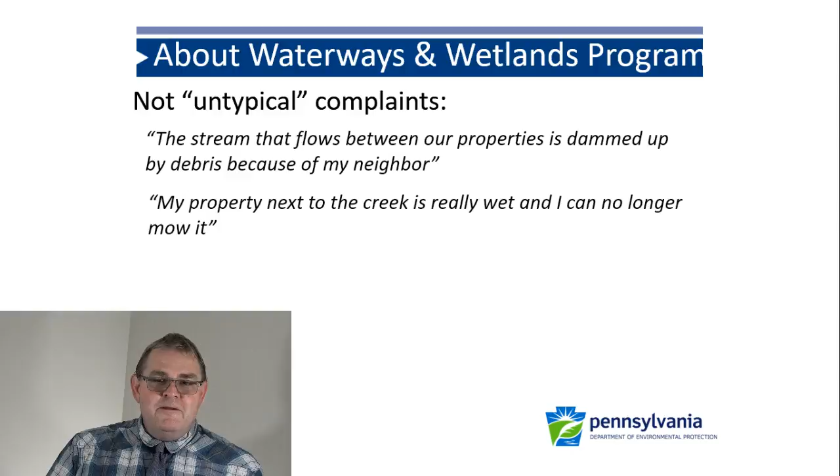My property's really wet, I can't mow it any longer. I lived there for 12 years and never had flooding before. The creek next to my property is flooding my yard. My neighbor is directing stormwater onto my property. My municipality will not maintain the stream located behind my house. And my neighbor built a dam.

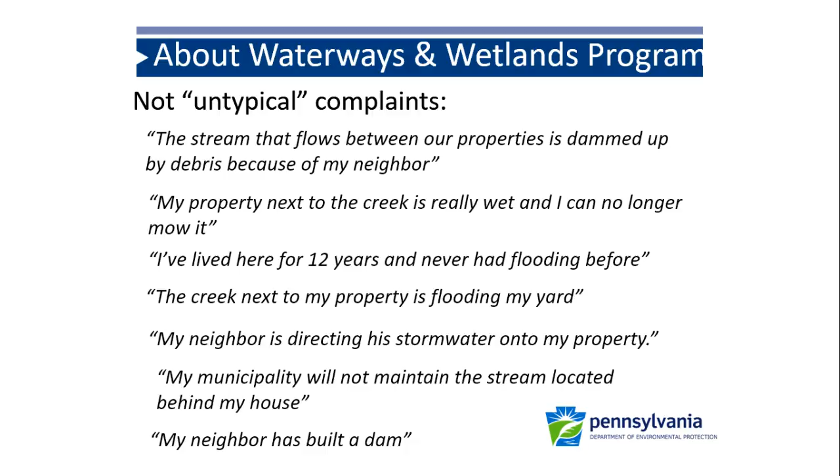These are a lot of comments we commonly see from citizens, and this is usually followed by the phrase, I was told by, you fill in the blank, that you could help. So they call DEP and say, there's a tree in the stream behind my house, I need you to get it out.

We're a regulatory agency. We're not a resource agency, we're not a conservation agency, we're a regulatory agency. So we review and act on permit applications, we conduct inspections and investigations, we take enforcement actions as necessary, and we develop regulations, policies, and procedures as required by legislation. Sounds very dry, but that's kind of what we're about often.

I'm with the Waterways and Wetlands Program, so we're going to talk a little bit about the Waterways and Wetlands Program and our impact. For our program in the Southwest region, I'm located in Pittsburgh. We have the 10 counties surrounding Pittsburgh as far as our jurisdiction goes.

Under Chapter 105, we regulate activities in streams, wetlands, and floodways. This includes wetlands, which are considered part of watercourses. Under Chapter 106, we regulate floodplain activities for municipalities and utilities only. We regulate construction stormwater and post-construction stormwater activities, that's in Chapter 102. We inspect dams.

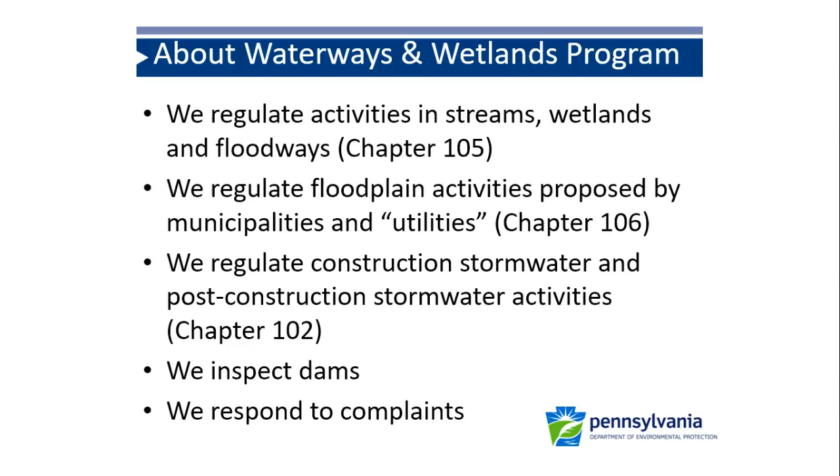My talk is primarily going to be on Chapter 105, because that's what most people seem to be interested in this time of year and the activities we're having. In Chapter 105, we have encroachment, which is basically an activity that changes the course or current of a stream or watercourse. This includes structures below the ground, even though they may not be seen. An example would be a utility line, so that's an encroachment.

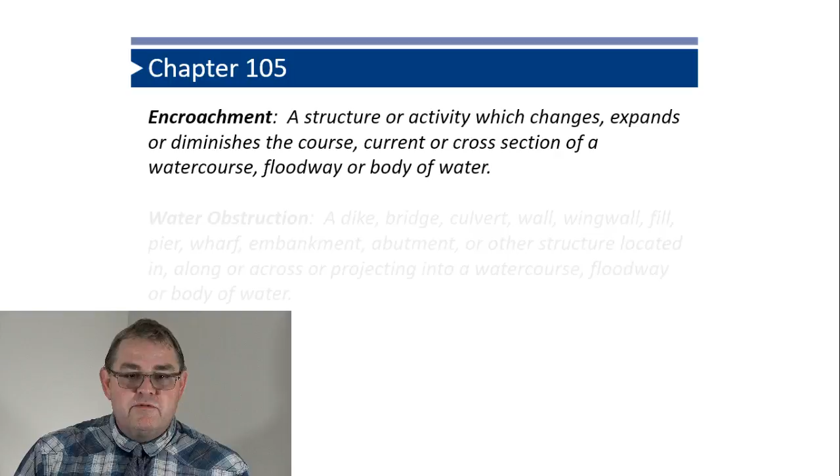A water obstruction is something that would obstruct the flow. So basically all obstructions are encroachments, but all encroachments are not obstructions. And I have a little illustration to show this.

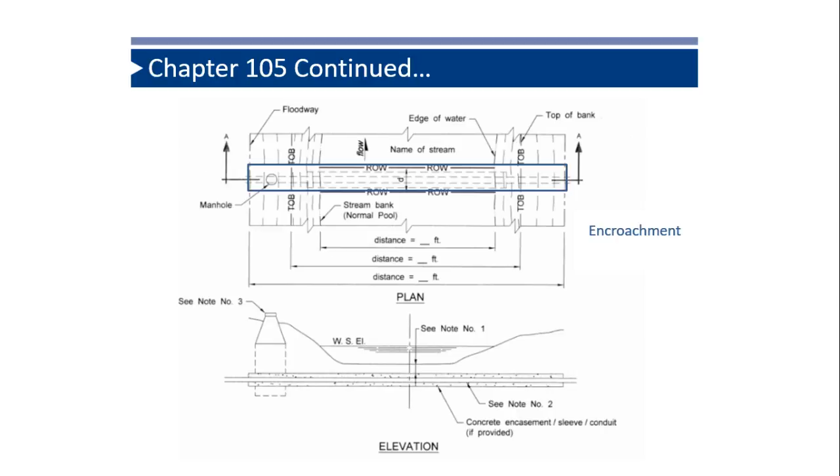This is from one of our permitting programs, a typical plan and cross-sectional view of a utility line going under a stream. That blue rectangle there is showing the encroachment area, the area that's going under the resource. You might ask why it's wider than the pipeline - well, the right-of-way is part of the encroachment because the right-of-way will have to be maintained. So there's your encroachment again on the cross section.

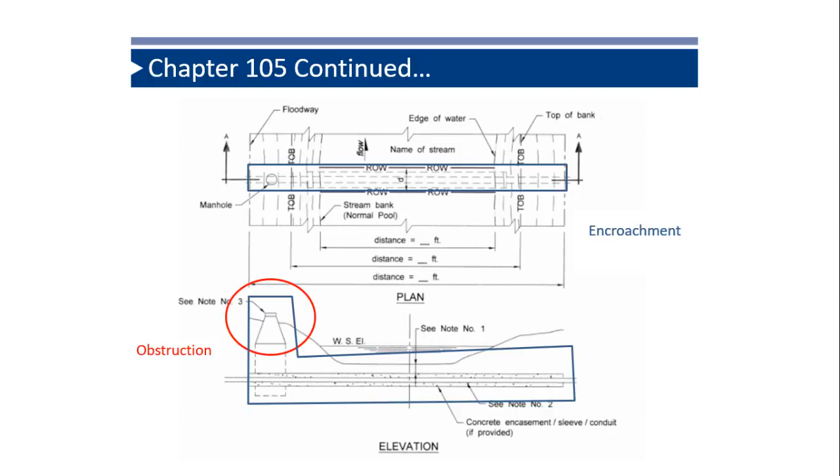The area right there is actually the manhole, part of the manhole sticking up. That can obstruct the flow, and it's in our jurisdictional area, which I'll talk about later. So that's an obstruction, and that obstruction is an encroachment. The other encroachment is not an obstruction because it's not obstructing the flow - a simple way of thinking about it.

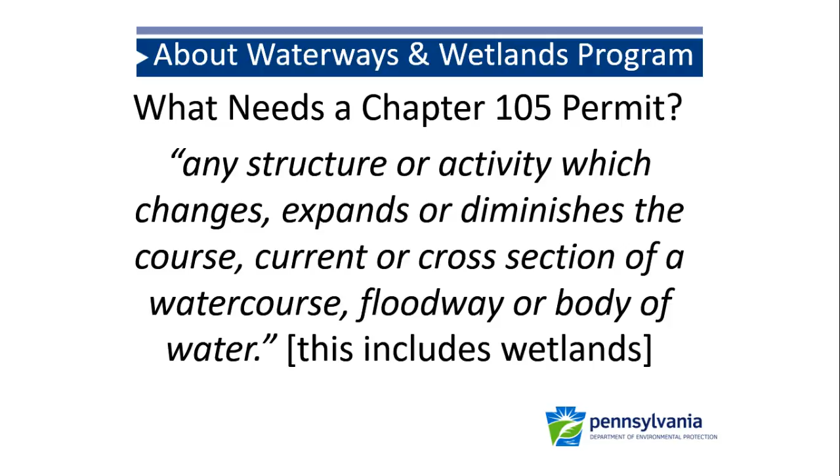So again, just to reiterate, what needs a permit? If you're going to do something that changes, expands, or diminishes, including wetlands, it's going to need some kind of authorization from the department.

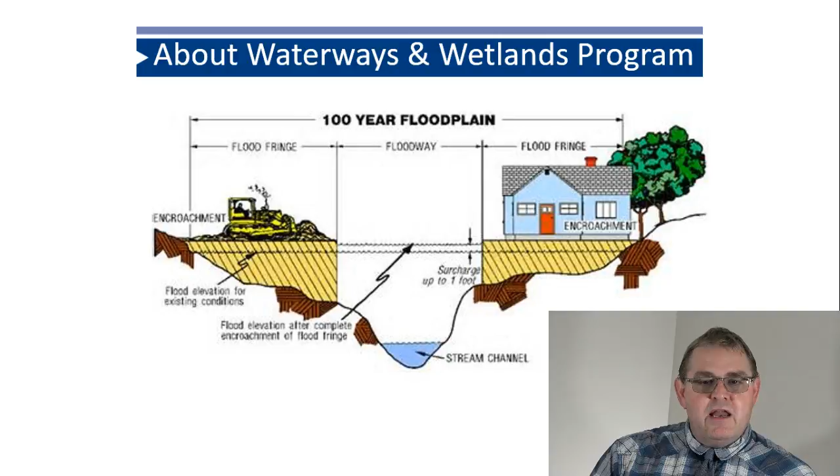This is a typical cross-section of a stream. You can see the middle part is called the floodway - that's our jurisdictional area, so we regulate activities in the floodway, which includes the stream and the floodway itself. The floodway is either determined by a FEMA study, or we assume it's 50 feet from the top of bank on either side. Folks can have the opportunity to try to prove that it's less. The area outside the floodway, shown in this sketch as the flood fringe - there's the DEP part.

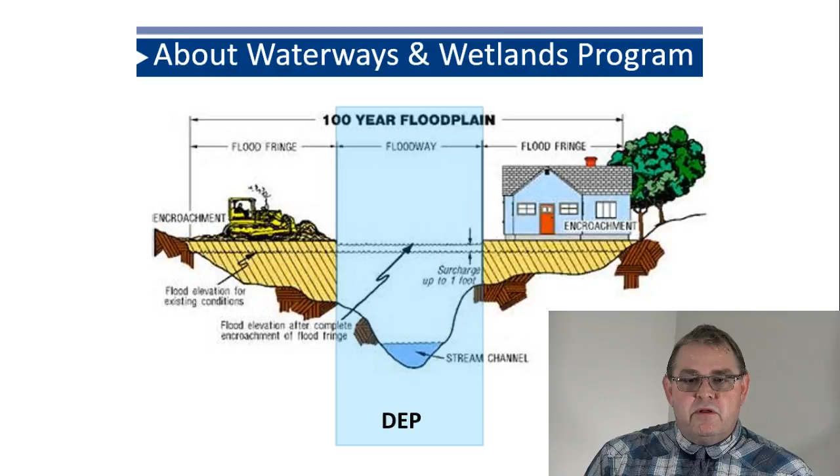That's the municipality's responsibility for management. The only time DEP gets involved with those areas is if the municipality itself or a utility wants to place fill in those areas. Since the municipalities are charged with it, they can't regulate themselves, so that's when DEP steps in. I mentioned Chapter 106 before — that's where we step in the floodplain.

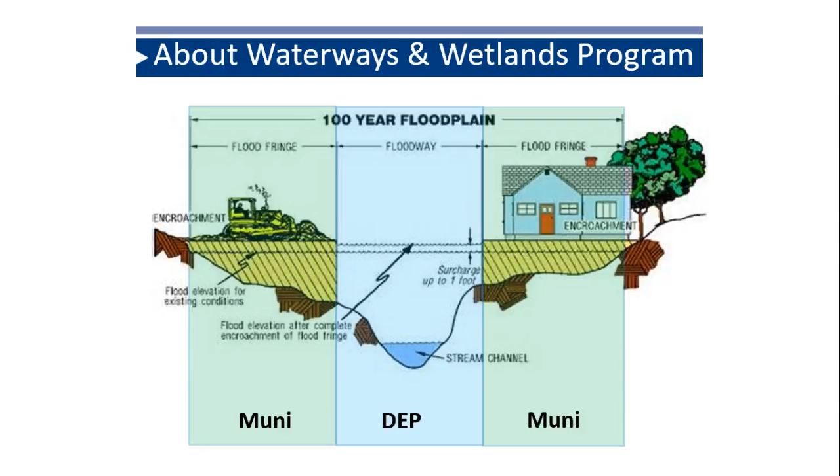Some of the things we've seen in the last couple years: areas flood where flooding never happened before. Areas that flood are flooding worse. We saw the news last night — flooding seems to be getting worse. Our rain events seem more intense. A lot of our stuff is designed for what we call the 2-year storm, so that storm should only happen every other year. It's a statistic, but anecdotally we see 2-year storms much more frequently than every other year.

Yeah, and conditions seem to be worsening, I think is the general comment here.

So what can I do without a Chapter 105 permit? You can clean and maintain your existing stream structures. If you have a structure, such as a bridge or a culvert, not only can you, you're required to, and there are standards which we'll talk about a little later. So we have standards for channel cleaning and bridge maintenance.

You can remove debris from the stream floodway working from the bank. If you want to work from the bank, you can remove material, and you're supposed to remove that material out of the stream.

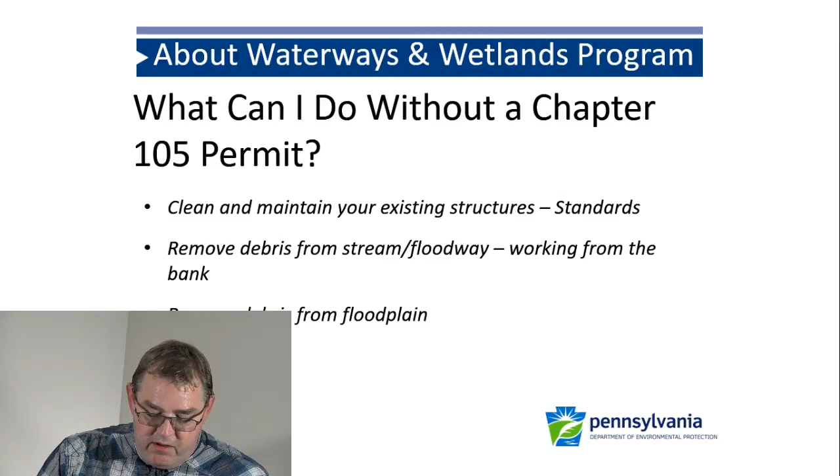And remove debris from the floodplain. Again, DEP is not regulating floodplain activities, but remember, the floodplain is an area where when you have flood flows, that's where the excess water will go so it doesn't go and cause more problems downstream.

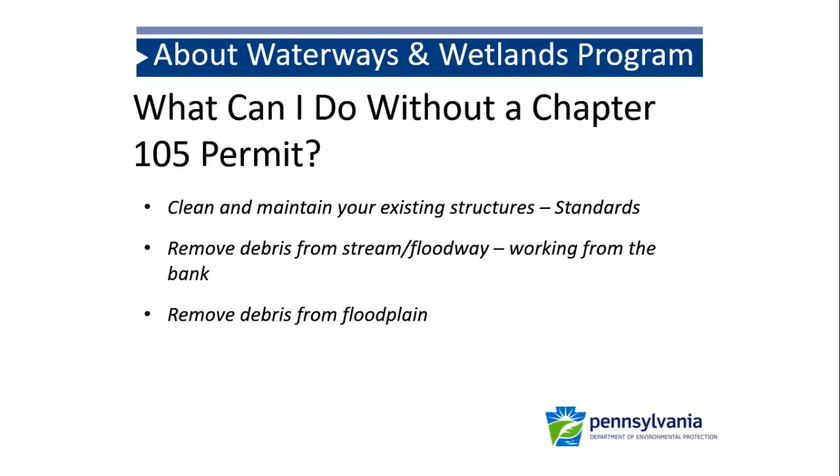I think one of the things, as we go through these with municipalities and other elected officials, is we see they don't understand the process. So that's one of the reasons we're doing this, and we work with people to try to get the authorizations they need.

So one of the things that was developed by DEP folks — I wish I could say I had a lot to do with it, but I had nothing to do with it. I love it though. If you don't have it, you should get it. The link shows at the bottom of the page. If you don't want to type that much, I did an independent search on my computer: if you type in 'DEP stream guidelines,' it invariably showed up as the first thing. And you click on it.

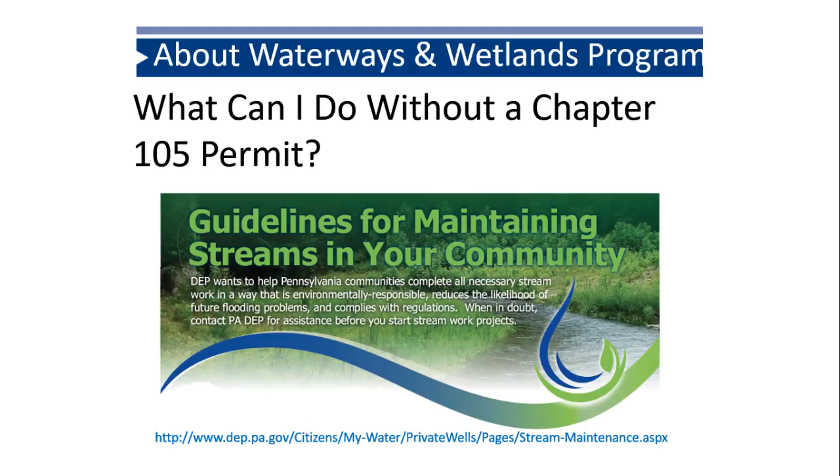It's a document put together about what you can do: one, what you can do without a permit; what you can do that might need a permit; and what you can do that definitely needs a permit. So we're going to go through some examples — part of this document is the green light, things you don't need any approval from DEP for.

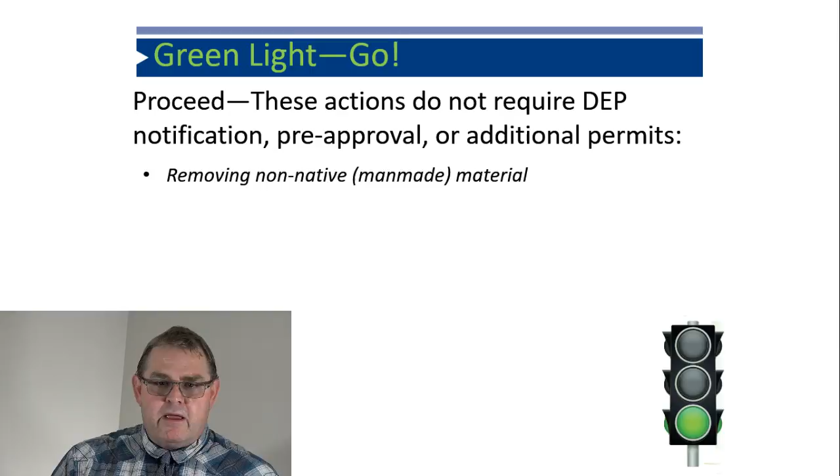So removing non-native man-made material — tires, appliances. I know we did cleanups where we found safes in the stream. Those can be removed from the bank, and they need to be removed.

Removing woody debris while standing in the stream. So if a tree goes down in the stream, you can cut it up and take it out. Again, the trigger is going to be equipment in the stream. If you're working from the bank or with hand equipment, pulling stuff out, no permit.

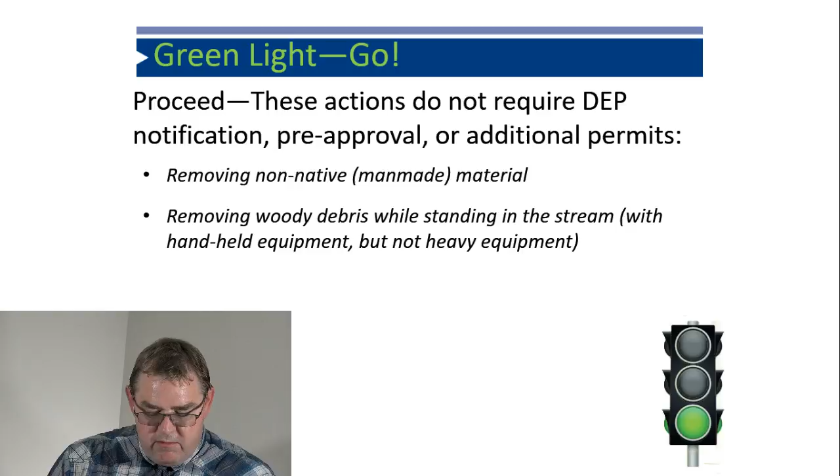So if you stand on the bank and remove it, you can have the piece of equipment go over to lift it out, because some of this debris or these trees might be rather large. So if you look at it, it says picking, not digging into the stream bed — you're picking stuff out.

If you're winching something out, if you have to winch it out or drag it out, my only caution is, if you damage the stream bank, you might just need to reseed it or something.

Cutting trees off at the stump — so you would do this along what I call the floodway earlier, the edge of the stream. Leaving the root system in does help stabilize the banks.

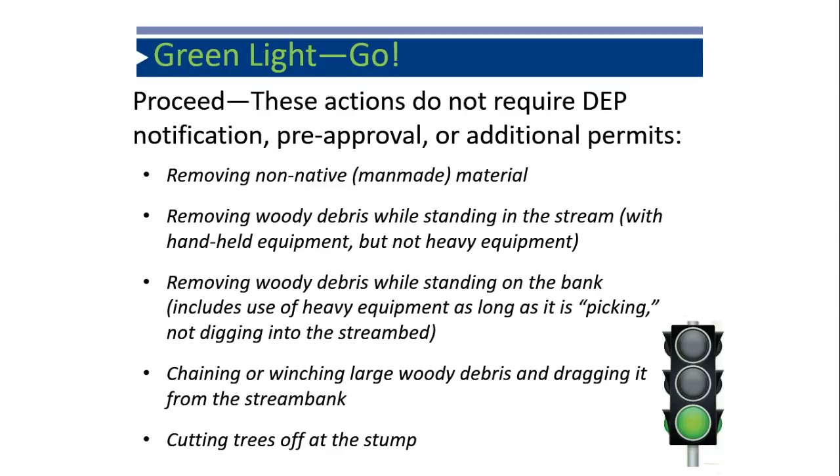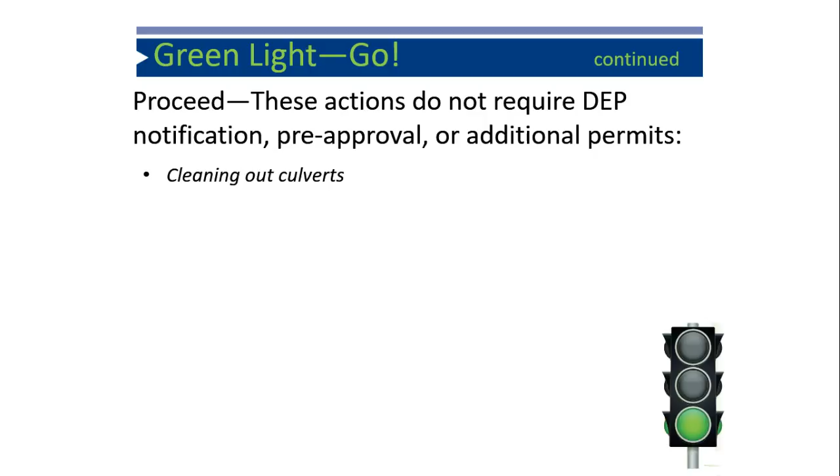Green light, go — there's some more additional things we're talking about: cleaning out culverts. Again, we'll go over this — if you have a culvert in a stream, you're required to maintain it. And we'll go over the standards again in a couple of slides.

Removing gravel and flood debris from around bridges and culverts. If you have a permit, it probably has a condition that says you must remove the flood debris from around the bridge, and you must maintain your culvert.

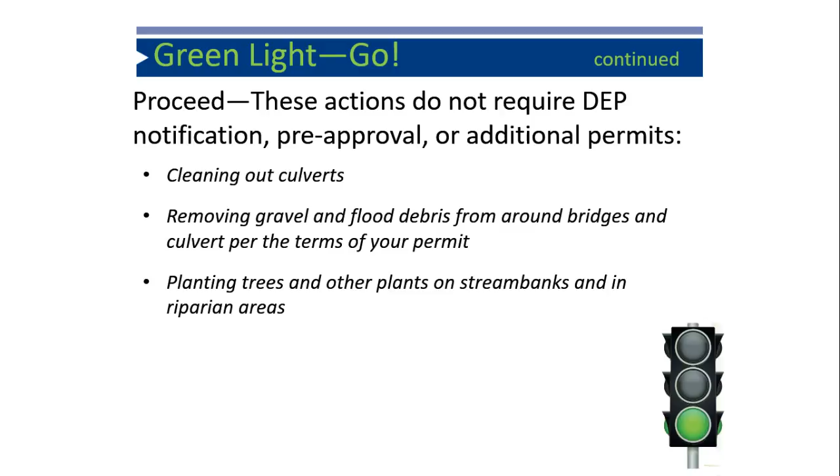You don't need a permit to plant trees and other plants on stream banks and riparian areas. Riparian areas refer to the buffer area between the stream and upland. We find buffer areas are extremely important to maintain the health of streams.

Adopting a stormwater management ordinance or best practice is something municipalities can do to manage development or construction around streams.

Crossing your stream to access the property immediately after a flood, if your bridge washes out and you need to get across the water, you can do that, again if the conditions are safe.

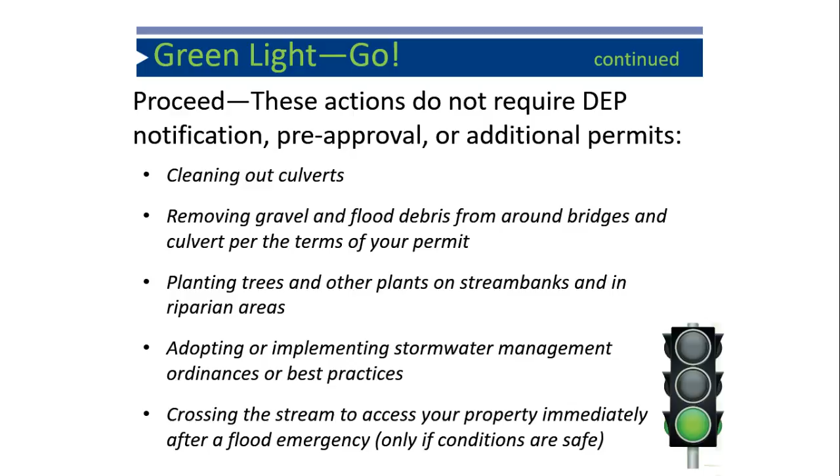Obviously, if it's a raging flood, you don't want to go into the stream. So next is the yellow light. These actions likely require DEP notification. This is where, if you think the slowdowns are the right thing, you might want to check with us.

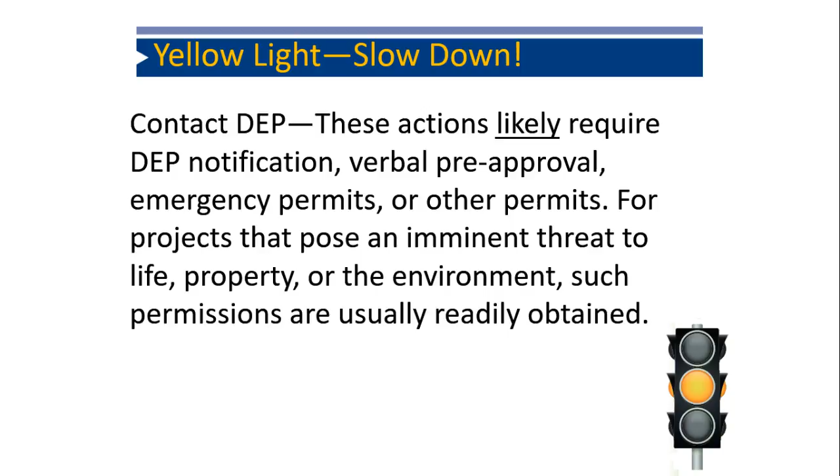This talks about emergency permits a little bit, and we're going to go into more detail about emergency permits. One thing is they're suggesting you want to contact DEP before you begin.

Rebuild roads and bridges across streams. I don't know a scenario where if you're rebuilding a structure across the stream you don't need an authorization from us. You need some kind of authorization, and that's the yellow light part.

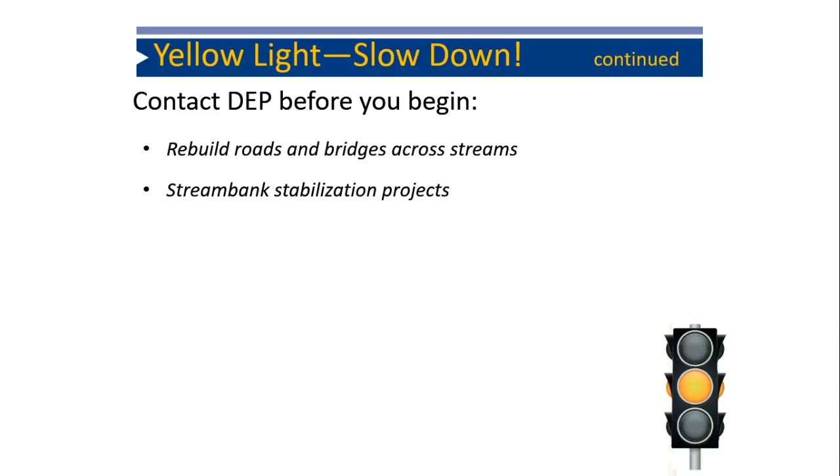Stream bank stabilization. Again, depending on what you're doing and where it is, you probably need some kind of authorization from us. Armoring stream banks with engineered riprap, and emergency situations - again, we do have emergency permits.

Again, this is a yellow light, but I don't see a scenario where you should go in and put stuff on the banks of a stream to try to armor it without an authorization from the DEP.

Removing gravel bars - so if you're in a channel above one of your culverts, you can remove a gravel bar. If you're working from the bank, you can remove the gravel bar, and there are some restrictions to that.

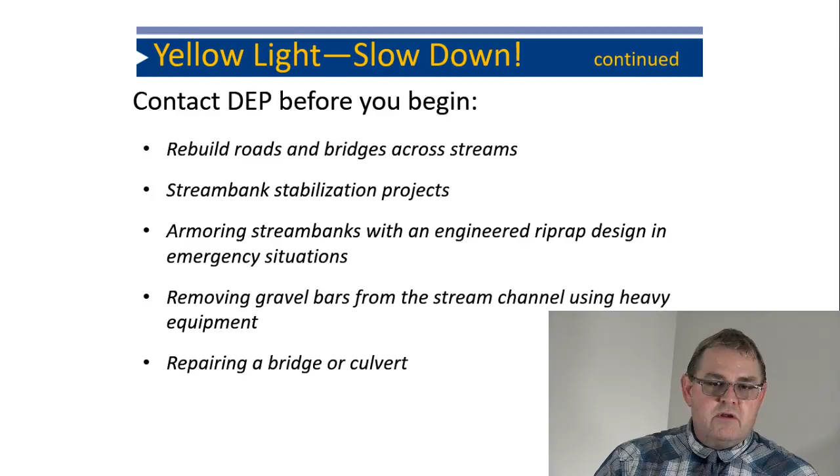Repairing a bridge or culvert, depending on what it is, most likely will require some kind of authorization. If you're just doing something on the deck and it's not affecting the waterway opening, you might be okay. Again, it doesn't hurt to call and get some clarification.

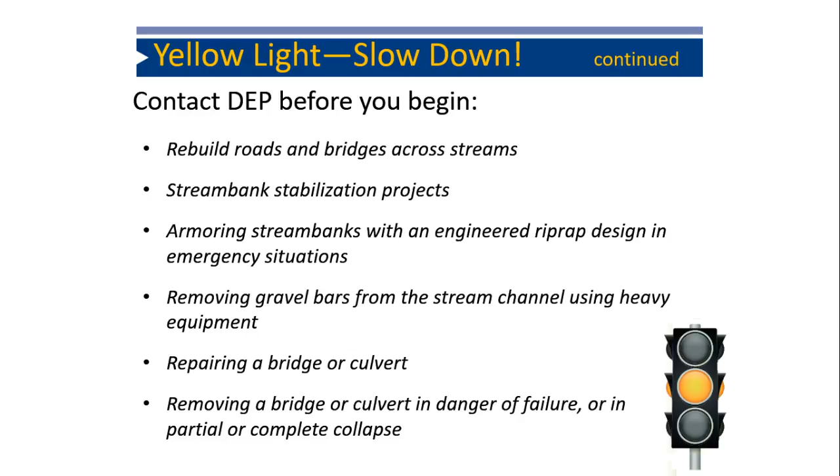Removing a bridge or culvert in danger of failure - well, if the bridge is going to fail and collapse and cause problems, by all means remove it. You probably need to come in and tell us what you did and how you're going to fix it. But if it's an emergency and it's going to kill people, you need to do it.

Then the next is the red light. These actions definitely require permits. So redirecting the flow of a stream by reshaping gravel bars, moving gravel to the stream bank.

A lot of folks over the years, I'll call it tinkering - they have some extra concrete and pour it over the bank. Typically these things seem innocent in and of themselves, but they can cause many problems further downstream because streams are systems, so anyone who affects the system can affect people downstream and upstream. We really need to review and have authorization for that.

Again, armoring stream banks with concrete or construction debris - those are very concerning things. Concrete and streams don't get along necessarily because of the pH and the constituents in the concrete. I can't think of any construction debris that would be appropriate to use for armoring a stream bank. We've found over the years there are many natural things you can do in streams to enhance and protect the stream banks themselves.

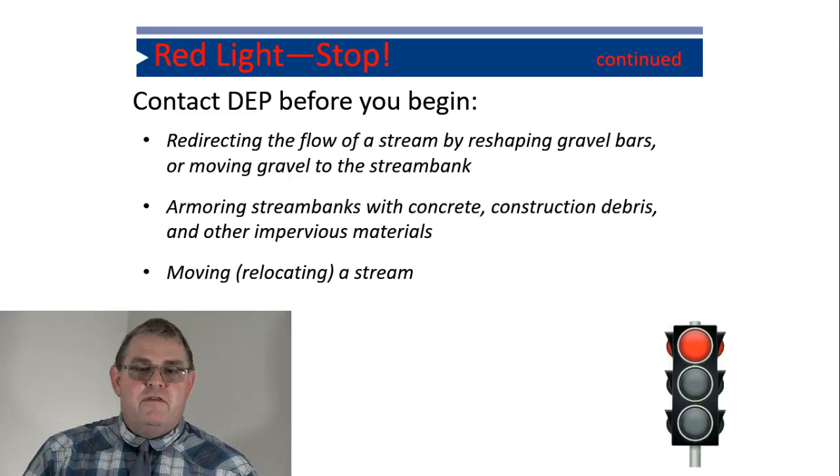Moving or relocating a stream - you definitely need a permit for that. There's no way around that.

Dredging streams, and we'll talk a little bit more about the word dredging later. Dredging - I dread the word dredge. When someone says, can we dredge the stream, I just have to pause for that one.

Creating dikes - if you're creating a dike, obviously you're changing the structure of the stream system by keeping it in the banks. Creating a dike requires a permit.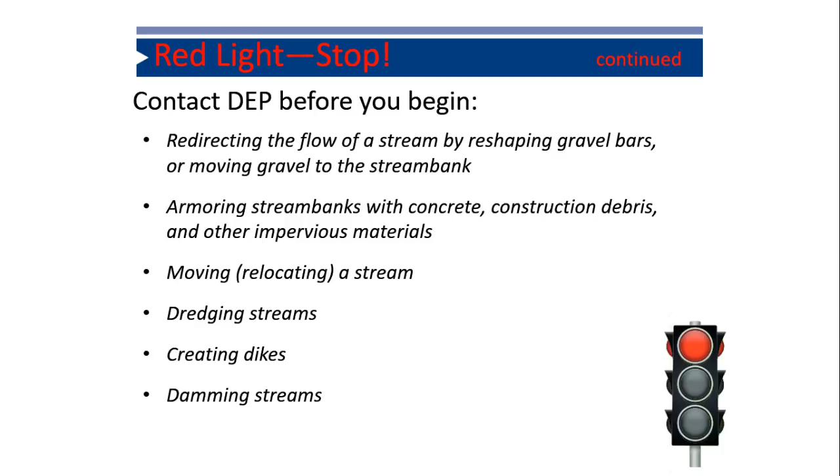Damming streams requires a permit. It depends on the size of the dam and the size of the watershed - it may require a permit from dam safety. Impacting the stream itself, if it's not a big dam, may just require a Chapter 105 permit. But if you don't know, you should contact us.

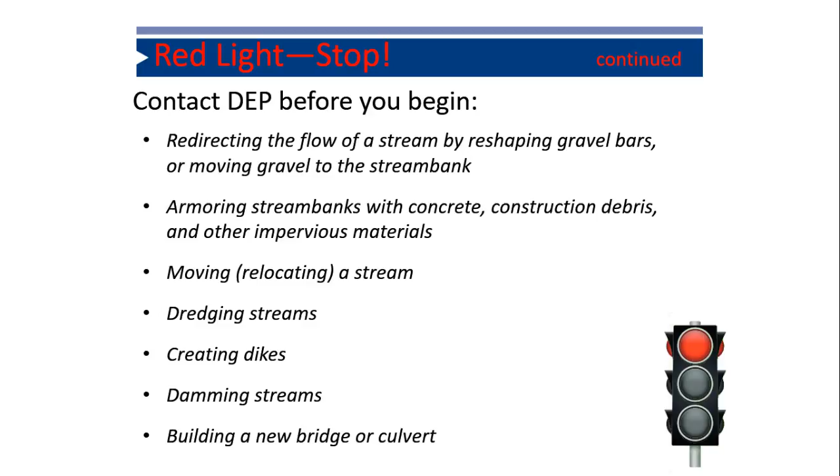Building a new bridge or culvert - obviously you're creating something that might be an obstruction. The bridge or culvert is generally going to be an obstruction, even if it does pass the flow properly. It's still an obstruction. You need a permit.

We have a few slides on activities where we can say whether it needs a permit or not. Does this need a permit?

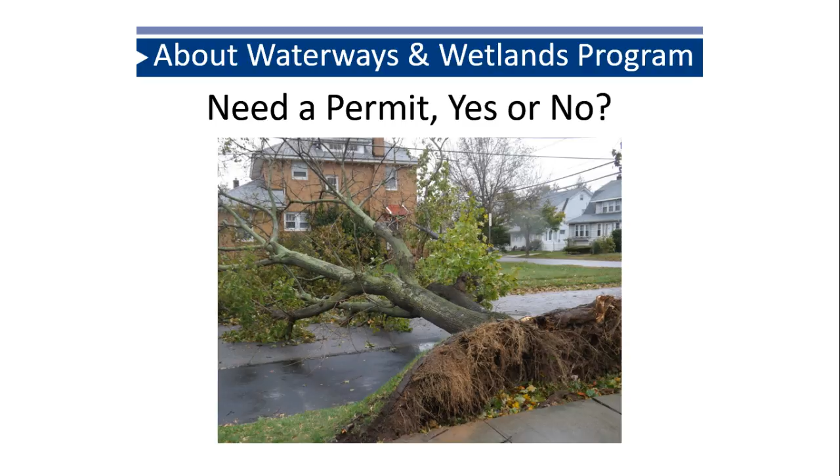So you have a tree down. Do you need a permit to remove it? This one's a big no. There's some water, but it's water on the street, outside our jurisdictional area based on the picture. You don't have to get a permit from DEP to remove that. That was an easy one.

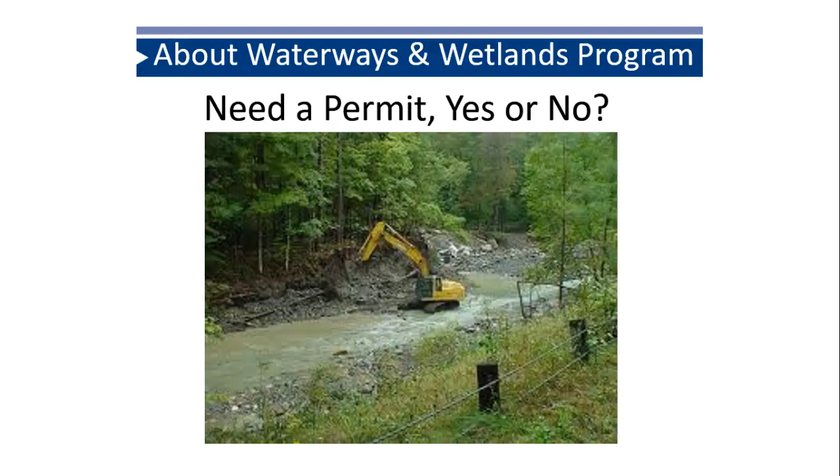They need a permit for this one. We see an excavator in the stream working on the bank. This is a big yes, you definitely need a permit to get in. The stream looks like it's got a lot of sediment in it already. It doesn't look much worse behind it, but there are no erosion sedimentation controls on that thing, and it looks like the water's high. That's definitely a permit from us.

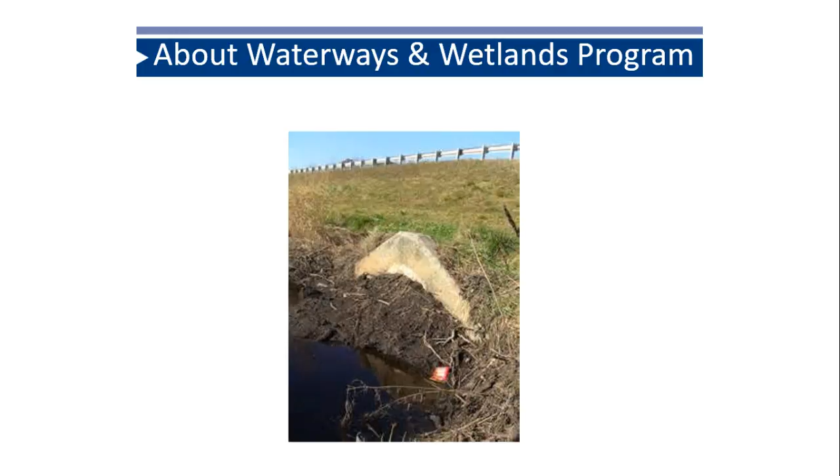So can they maintain this one, do you need a permit? Under the standards, they can maintain this. My only question is, can they, at this point, do the work from the bank? If they can do it from the bank, they don't need a permit. I don't see a way. We don't see the whole area. It doesn't look like there's a way to actually unclog that from the bank, so you probably need some kind of authorization from us to unclog that.

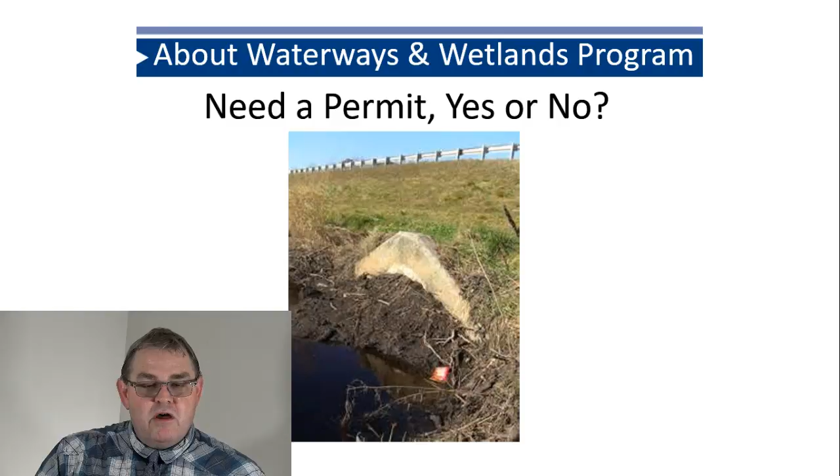The concern is when you unclog it, if there's a lot of water behind it, how it's going to suck into that culvert. So in this one, I would probably say that the people who own this culvert are not doing routine maintenance. It could have been from a storm event, but it looks like more than that.

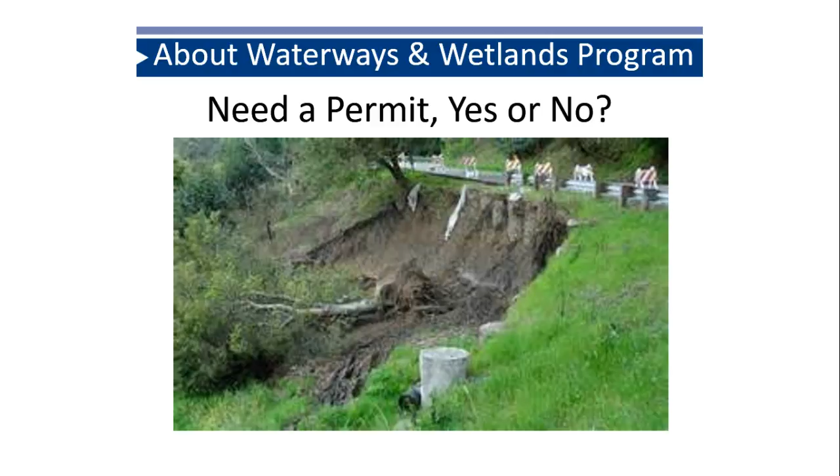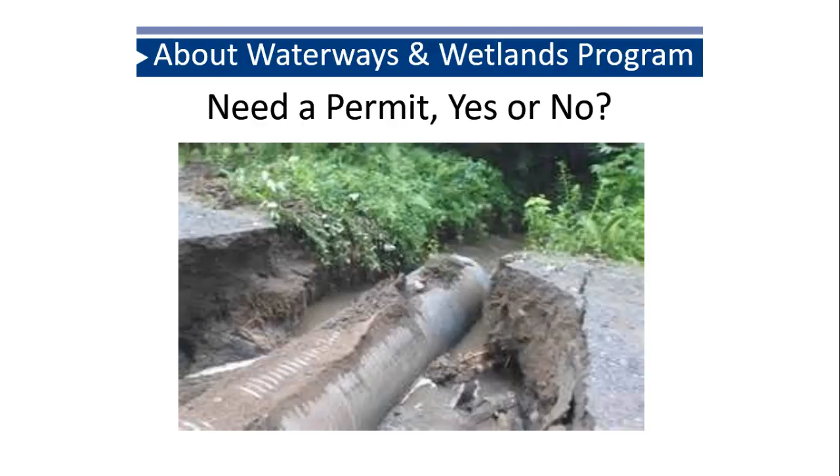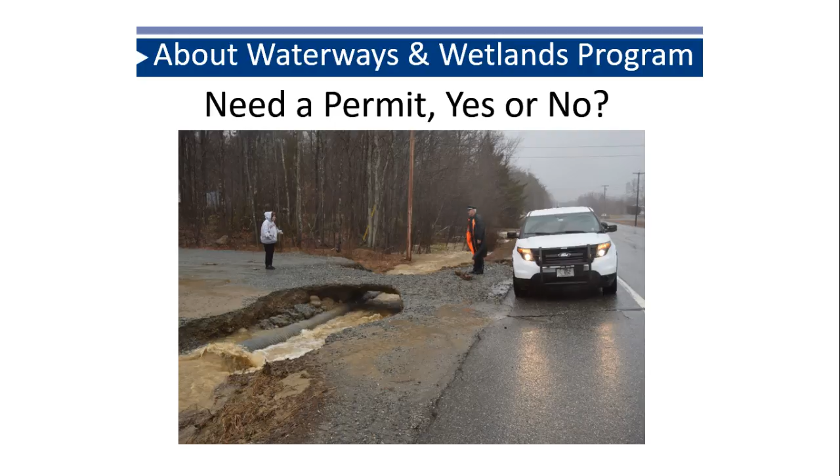Obviously, I'm assuming she's in her driveway for her house and her culvert washed away. I would not walk across that. She needs a way to get across. This is clearly an emergency, and we would issue an emergency permit. It looks like maybe the culvert's still sitting in there, but there was some event that actually overwhelmed the system. So even though she would need a permit to replace it, we can provide an emergency permit the same day for that kind of thing.

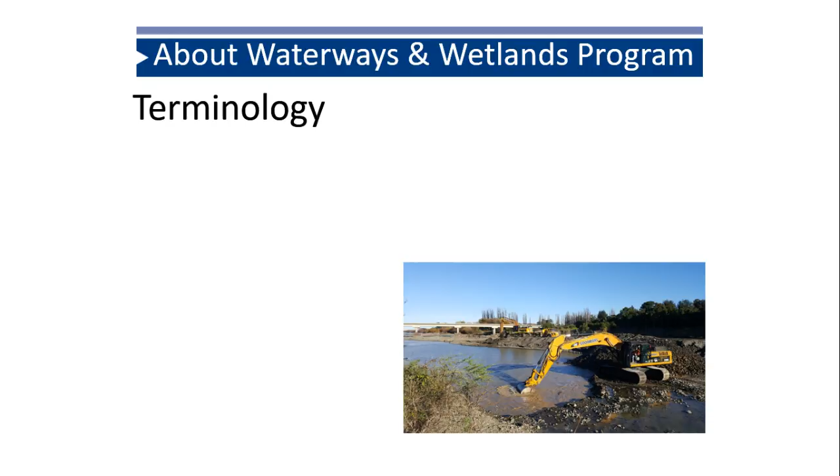So we'll talk a little bit about terminology. The first one, dredging versus sediment removal. We'll talk a little bit more about dredging in the next slide. Dredging means a lot of things to a lot of people. Sediment removal, when we talk about sediment removal, if you have some sediment accumulated after a storm event at your bridge or culvert, you can remove the sediment. There are conditions for how much you can take out, how deep you can go. That dredging means something much different to us.

Channel cleaning, debris removal, we went over this in the green light. So if you have some deposition at your structure, you can remove that. Debris, you can always remove debris. Again, if you're working from the bank, you're okay. You can winch it out, you're okay. But as soon as you want to put a piece of equipment in the stream, as in the picture, you're going to need some kind of authorization from DEP.

Maintenance and replacement—you know, we saw some slides where the culverts were damaged. We have different applications we can put together, or you can put together for us to authorize the work.

Again, some of the things, when we have activities, people see streams, they don't always see wetlands. One of the complaints was, I can't mow because my property is wet. That's a red light to me that your property is probably a wetland. You may have mowed it for 20 years, but it's still there, and so it has hydrology. It likes to be wet. It may not have the vegetation because you mow it, but it might be a wetland.

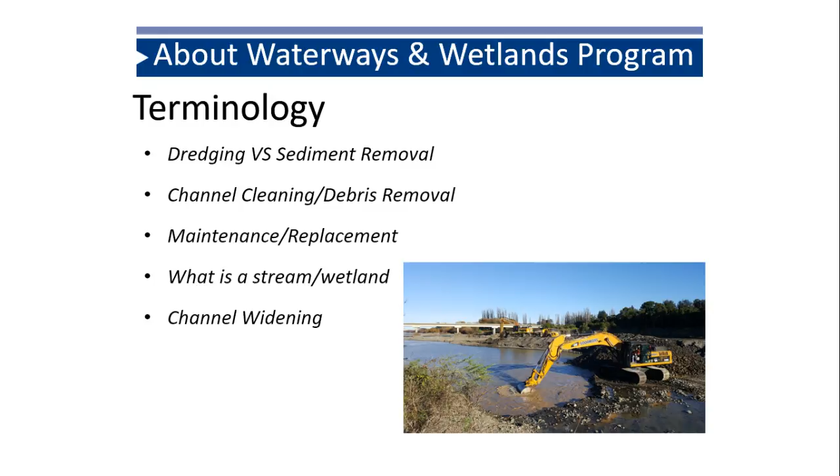I think in cases we've had some areas where we've actually put structures in—I did it in my prior position, working with municipalities, to put structures in to actually narrow streams so that when they have a higher flow, they carry the sediment. Streams are sediment transport systems; they transport sediment. If it's very wide, it drops stuff out, and you never know what's going to happen.

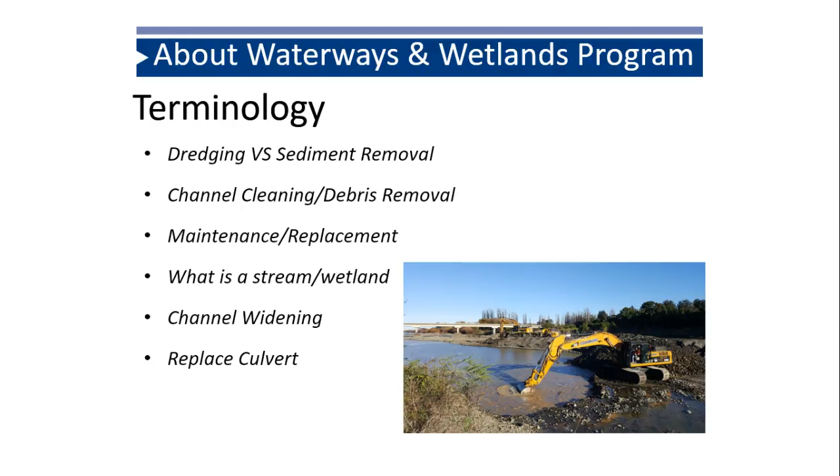Replacing a culvert: if you want to replace a culvert or bridge, you need an authorization. But one of the issues we have is we're going to ask you to make sure that when you replace the culvert, you're not going to increase flooding. Any increase in flooding is an issue for us, because your one inch increase may not seem like a lot, but that one inch may flood somebody that had never got flooded before. So that's important for us.

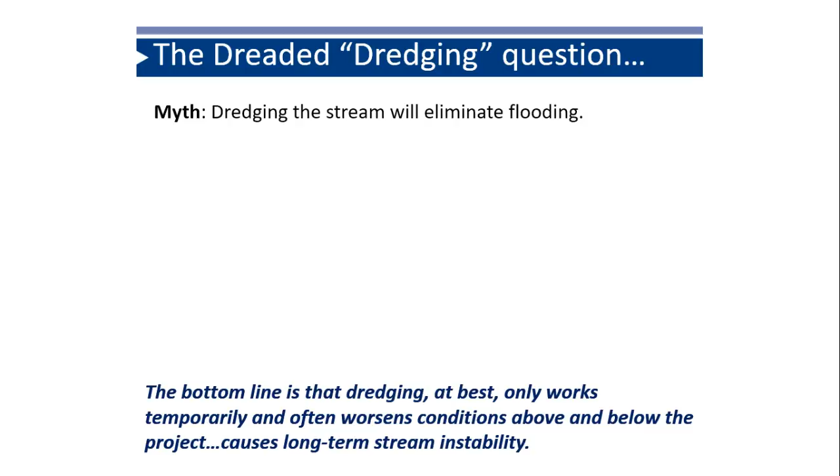Okay, the dreaded dredging question. Here's a myth: dredging the stream will eliminate flooding. Now the reality—I'm not going to read all this to you, it's probably too much information for one slide. I violated PowerPoint rules 101.

But basically, dredging destabilizes the stream. It causes rapid sediment deposition in the channel. It can increase flooding downstream. It accelerates erosion, and it has a big impact on the aquatic habitat and food chain. We don't want to forget our role is to protect the environment too.

So when someone comes to us and says they want to dredge the stream—why can't I dredge the stream? We used to always dredge the stream. We always try to explain the bottom line: dredging at best only works temporarily, and generally worsens conditions above and below the project. It causes long-term instability of the stream.

You want to take a bulldozer and widen the stream and deepen the stream—you're actually disconnecting the stream from its banks. You'll worsen flooding, you'll increase the flood. And what happens oftentimes in that wide area, when you have sediment transport, it's going to deposit the sediment right there because it's wider. So when it's moving fast and it comes to a slow area, it drops all that material out. Dredging in and of itself—I dread when someone says we want to dredge. Why can't we dredge?

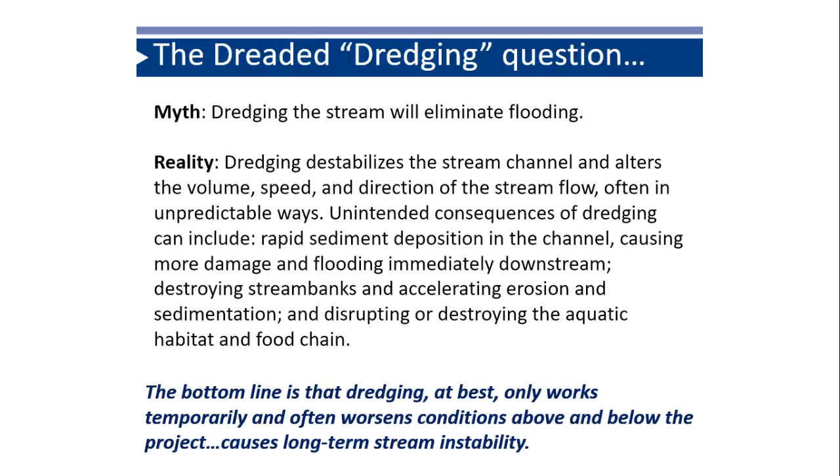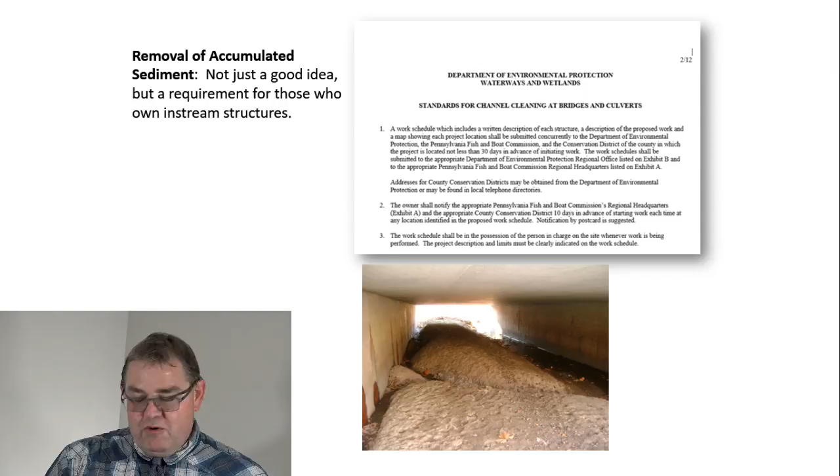Some of the key things though—you just can't, you know, we're regulatory, so we're not just going to say go ahead. It's not a green light, it's a yellow light. So there are requirements for you to do. You must have an erosion sedimentation pollution control plan, so you're going to have some means of managing sediment during the activity.

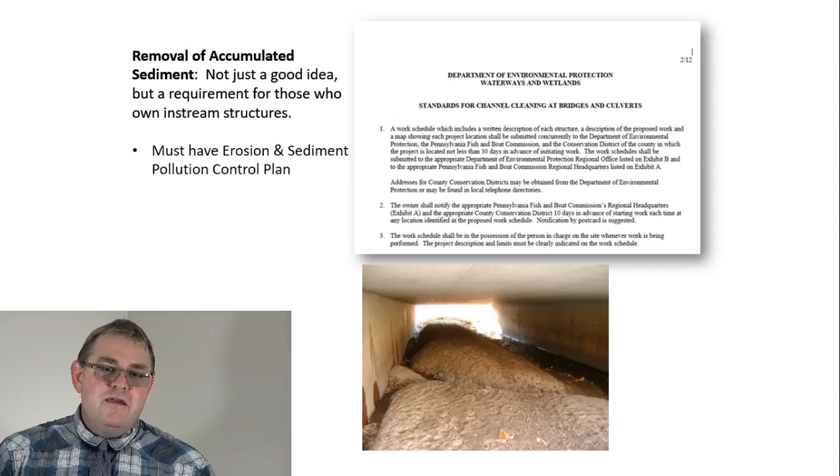We're going to look for that to be done and probably reviewed by the County Conservation District. I'm hoping you all know that every county in our region has a conservation district, and one of their expertises is erosion sedimentation pollution control. So they're the folks who not only will review the plan, but can give you a lot of information on what they've seen and what works and what might not work.

Again, you're limited to 50 feet above and below the structure. We can't go 200 feet. It's a reasonable distance to manage your structure. If you feel the need to go further, you're going to need some kind of authorization from us beyond meeting this document.

There are limits to how much you can remove. Folks want, once I'm in there with my excavator, to just say 6 inches is good, 18 inches is better, 5 feet, go for it. That's not the way it works. There are limits spelled out in the document about how wide and how deep you can go. Basically, the width is going to be the general width above and below the culvert, about as wide as you can go. The depth maximum is, I believe, 6 inches below the high water, I'm sorry, the natural water level.

You're going to have to provide the plan. One of the things is you have to remove the material from the floodplain. We see folks whose plan is to put it in the floodway. That doesn't make a lot of sense to us because if you have a flood condition, that material is going to go right back into the streams. So you have to take it away from the floodway, and we're going to want to know where you're going to put it.

You have to provide a plan to us on what you're going to do. That way we can be sure that you're doing things properly, you understand what they're supposed to do, and that you will oversee your contractor to make sure that they're doing things properly.

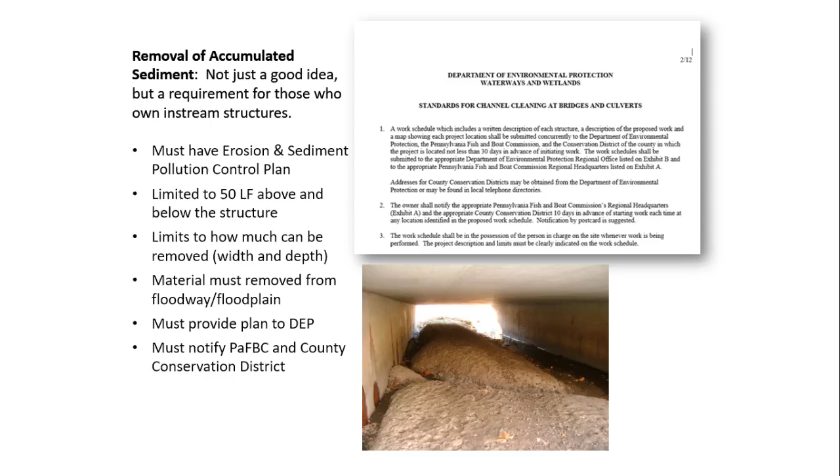You're going to have to notify the Pennsylvania Fish and Boat Commission and the County Conservation District so they know what activity you're doing. If you're getting into the stream and might discharge some sediment, you want the Fish and Boat Commission folks to know about it ahead of time. And the County Conservation District, you should engage them in your design because they're experts in that kind of activity.

You may need other DEP permits for in-stream work. If you want to get a piece of equipment in the stream, like in the picture here, I don't know how you would do that otherwise. I guess you could do it with buckets and shovels, but that seems like a lot. So you're probably going to need some equipment in the stream, and you're probably going to need some kind of authorization from DEP.

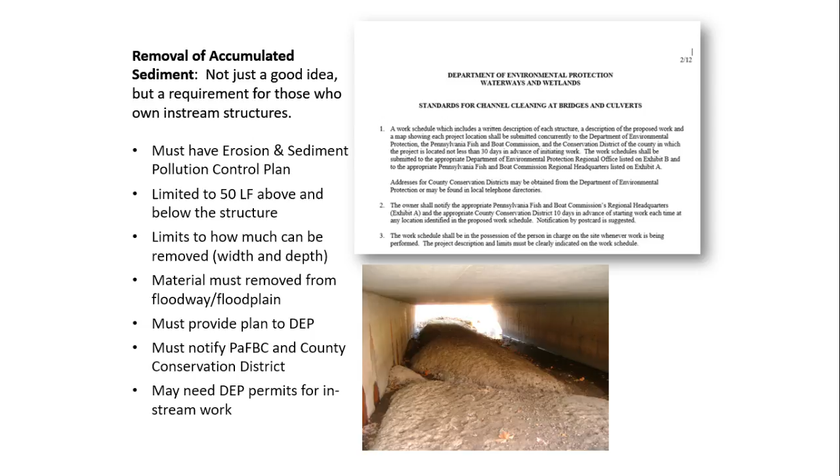I'm going to go into the types of Chapter 105 water obstruction and encroachment authorizations. The dreaded one that everyone fears is the joint permit application. It's called a joint permit because by applying for it, you're actually applying for a permit from us, the DEP, for state authorization, and also applying for federal authorization through the U.S. Army Corps of Engineers, which I abbreviate as USACE. So joint permits are a more involved process.

We also have general permits. We have identified certain criteria for certain projects, like a small dock, bank stabilization, or repair of existing structures. There are general permits that are published along with the criteria. If you want a general permit, for instance to repair your structure, that's a GP11. You would look at the conditions and ask, does my project meet the conditions? Then you would send in a registration form. We're not going to issue a permit to you; we're going to acknowledge your registration package for a general permit.

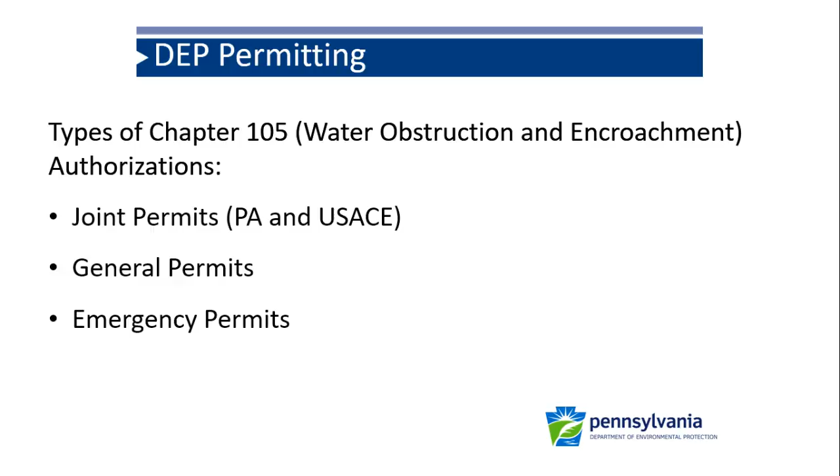Emergency permits, we'll talk a little bit more about them later because most folks glom onto 'it's an emergency, I need a permit.' Then there are waived activities, activities that are jurisdictional for us, but because of certain circumstances, we waive permitting requirements. You're still under our jurisdiction, but because of the nature of them, we can waive them. A little bit more in depth, joint permits again go to both the state and the Corps of Engineers.

One of the things we do with joint permits is the Corps of Engineers, with the DEP, developed what's called the Pennsylvania State Programmatic General Permit. It's number 5 right now. When I started it was 3, but we're up to 5 now. So in many cases, we can provide federal authorization, so you don't have to go to the Corps and get a separate permit for the activity.

I'd say, ad-libbing here, 75% or more of the authorizations we give qualify for the general permit from the Corps, so they don't even review it. They're nice folks though. Again, you're applying to both the DEP and the Corps of Engineers.

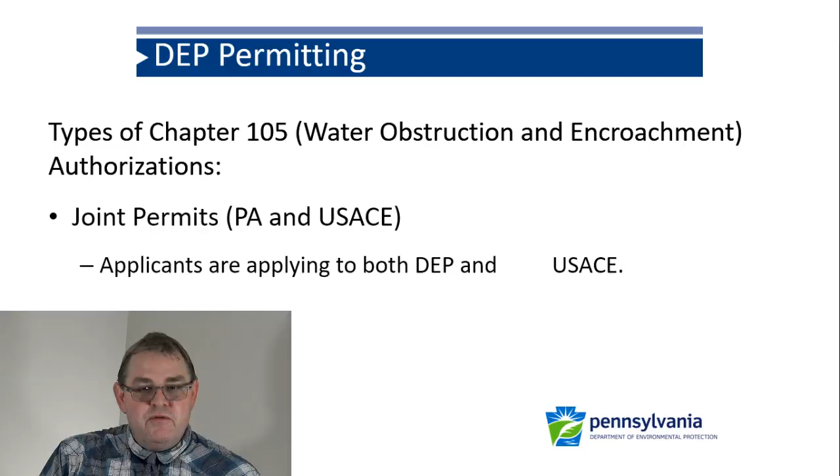The thing about joint permits is we have to publish them in the Pennsylvania Bulletin as an application. There's a public comment period, it's a 30-day period. Again, it's a longer process, a higher level of review.

Next, we're going to talk about general permits. Again, you're registering your project if it fits the criteria established in that permit, and this is usually a simpler process. I think the conditions in general permits are pretty black and white generally. We do see a lot of folks try to fit their square peg into the round hole of a general permit.

A general permit, I've seen us issuing—acknowledging—within a month. We've had some take 4 years to get resolved. So again, the process is usually simpler. If we find it doesn't meet the requirements, we'll return it and suggest you apply for a joint permit. Again, you still need a DEP acknowledgement before you proceed—just because you send in your registration doesn't mean you can start the work. You still need us to acknowledge it.

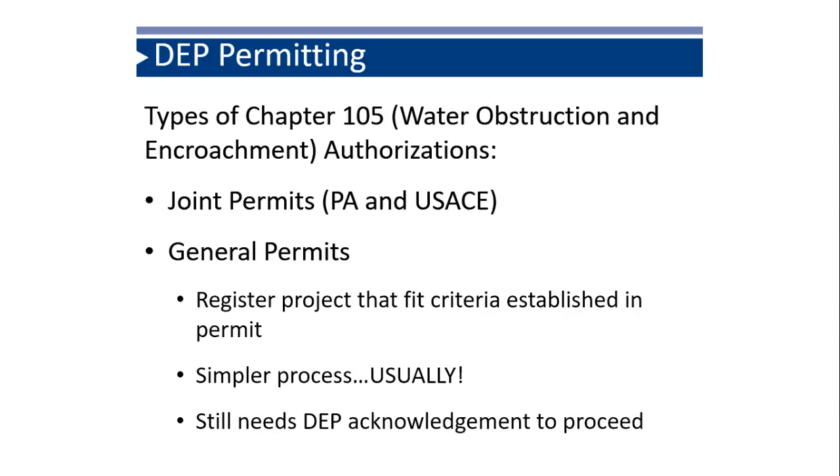After a storm, we see a lot of requests claiming this is an emergency. I'll tell you a couple we see. A lot of folks, when we talk about emergency permits after a storm event like yesterday or last night, think they'll just get an emergency permit to fix this, without thinking about what it actually allows. So we had a municipality apply for an emergency permit after flooding a few years ago, for I think 20,000 linear feet of stream work.

Not every inch of the stream, but think about 20,000 linear feet—that's almost 4 miles of stream. That municipality could not do that work. Certainly not, since emergency permits are only valid for 60 days, so they couldn't have done that work anyway.

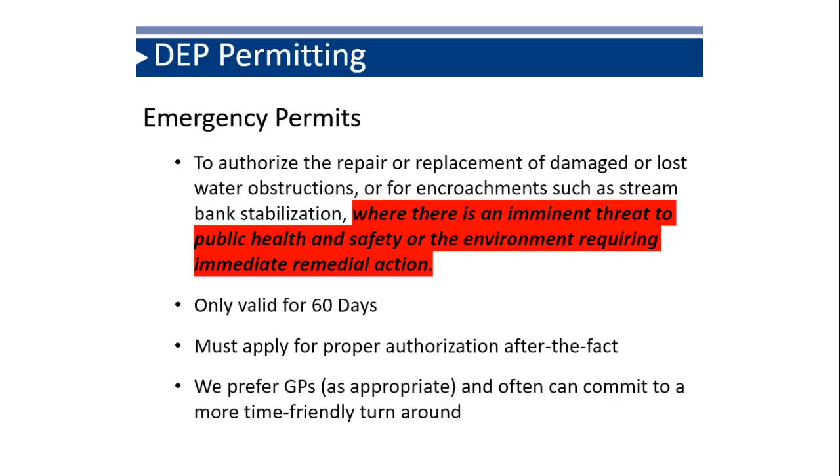Okay, I've never heard anyone say this: it takes too long to get a permit. I say that with tongue in cheek. I hear it all the time from people above me and from the regulated community actually.

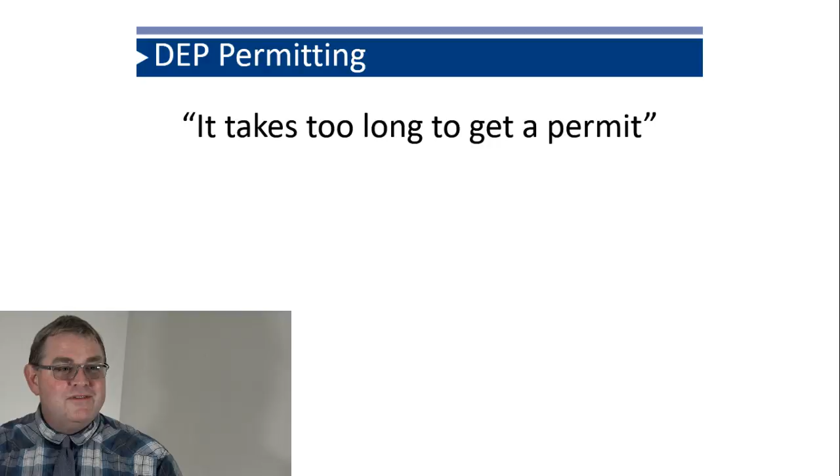So obviously the most common complaint - I would think when we tell someone they need a joint permit, it's almost like telling them their dog died. It's like, oh my God, I got to get a joint permit, it's going to take years. And we have some that have taken years. We have some that I've seen go as easy as 60 days.

We have another visitor. You're good.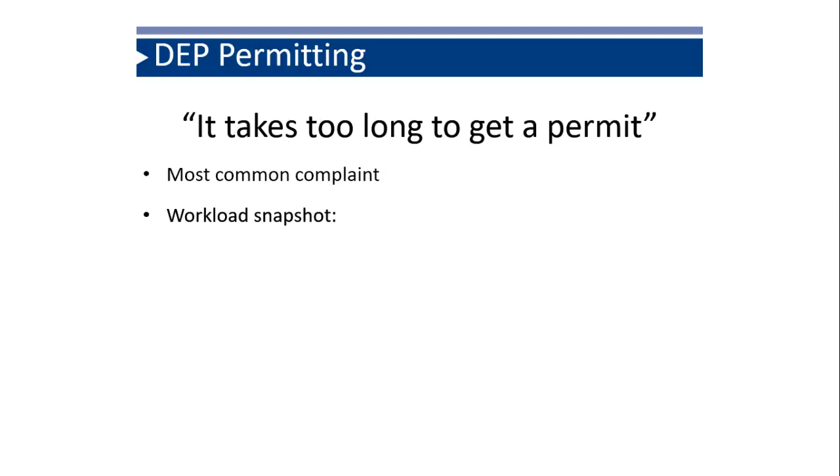So I'm just going to talk a little bit about the Southwest region, about why it might take a long time to get a permit. As of May 1st, when I was preparing this presentation, I did it before yesterday - we had about 200 authorization requests in our queue. Just think about that - 200.

Unfortunately, it doesn't often decrease. I think we're at 10 to 15 authorizations issued this week so far, and we've probably gotten more than 10 in. There's a legend in DEP that there's this slowdown period around the holidays - I've been in the job 4 years now, seems like 20, but in 4 years I've never experienced this slowdown period, never, ever. So we have a lot of work. There's 12 people that report to me.

So 12 of us, you want to do some math, how many authorizations per person, and this is a constant. People are busy. We're a program where almost anything you want to do, you need an authorization from us. You want to build a house, guess what? Your utility line is probably going to cross the stream, or you need a permit of some sort.

A lot of our permit authorizations are delegated to the districts. Still, I think 7 of the 10 districts in our region have delegation for 105, but we still have 200 authorizations in our queue.

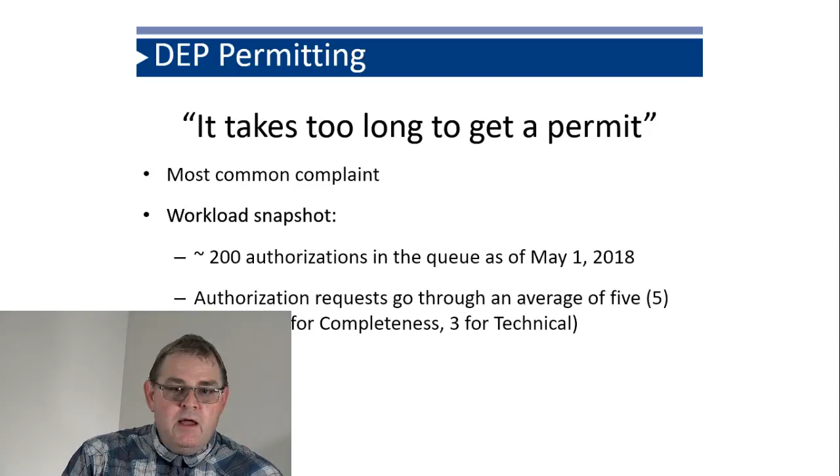Authorization requests go through an average of 5 reviews. Think about that, 5 reviews. 2 for completeness, 3 for technical. For completeness, we're looking for just the basic information we need to review a permit for technical review. The average one has at least 1 letter that goes out for completeness. So you review it, the letter comes back in, you review it again. There's your 2 reviews. And then for technical reviews, typically we're seeing 2 letters go out with deficiencies in them.

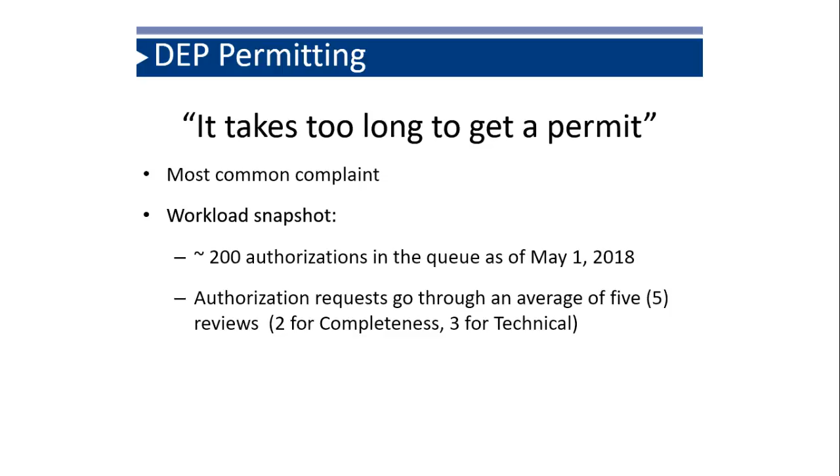I think the worst might be like they had maybe 3 for completeness and 5 for technical. We're really not looking to do that very often anymore. We need to not babysit people. We've been directed not to do those kinds of things. But if you're making progress towards a positive result, we're going to work with folks. That just gives you a sense of what the technical reviews are.

Very few applicants request pre-application meetings. The 2nd and 4th Thursdays of each month, we make available an engineer and a biologist to sit down with you to discuss your project and give you information on what permits you would need. If you want to impact a wetland, what might you need to provide to us? If you're going to relocate a stream, what you might need to do for us. So they can be very helpful.

I think anecdotally, sometimes people come in too early and their projects change dramatically from the pre-application meeting. We've had folks who come in, I think the most I've ever seen was 3, and as they progress through their process, that can work really well.

And the last thing is, DEP did a series of listening sessions. I've attended 1 or 2, and some of the feedback I saw - the regulated community was invited, some elected officials were invited, and consultants were invited to especially the one I'm thinking of. My 3 takeaways from some of the discussions were, after the complaints about DEP being too picky, we're inconsistent, all the typical things that we see.

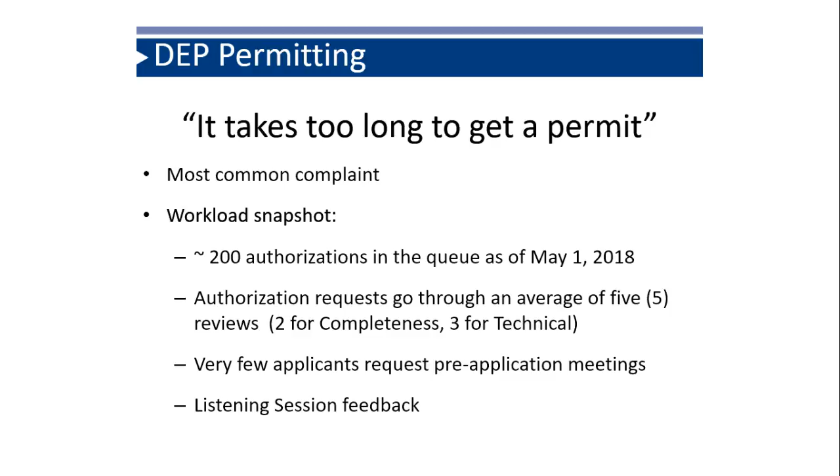Okay, so I'm in decent shape, I'm going to finish this a little bit early, but contacts - our general telephone number is 412-442-4000. This is our 24-hour number. So if you call between 8 and 4, we use military time for our time sheets, so I'm going military on you. If you have questions during our office hours, you dial the general number and ask for the Waterways and Wetlands in-charge person.

Every day, one of the folks who work with me is designated as in charge. So if you have a call, a question about permitting, want to set up a pre-application meeting, or have questions about the status of your permit, that person is available to you. If they don't answer, leave a message and they'll get back to you, generally the same day, certainly within 24 hours. Don't panic if they don't answer right away - the folks do have breaks, they do have to use the restroom. They will get back to you.

If you have an emergency during off hours, you can be connected to our emergency response folks. That phone answers 24 hours a day. We do have an emergency response team, and they can get a hold of permitting folks if we need them to.

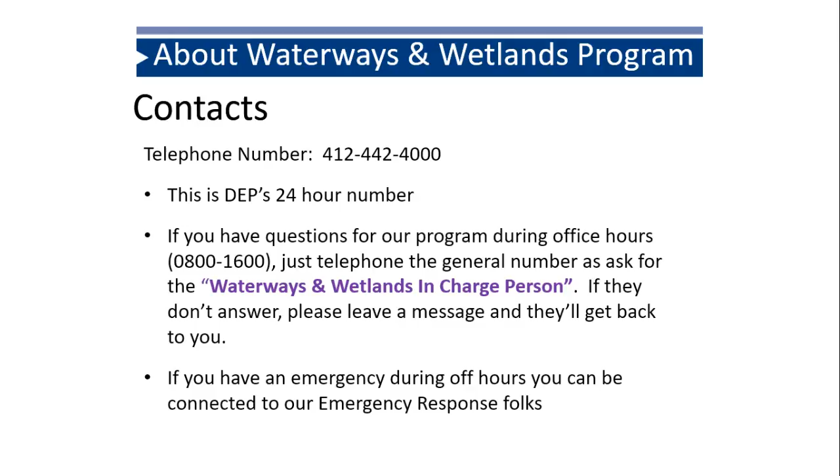I talk about this when I interview people - you're all familiar with the org chart where you see the person up here and all the people down under them in this nice little conical shape. In my program, if you invert that, it becomes a funnel. I'm the narrow thing of the funnel. So I have 12 people who can answer your general questions.

I generally try to avoid, say this - too late, are you recording this? No, I mean, I have great people who can answer your questions.

If I have to spend the time setting up a pre-app, then I can't do the other things required of the funnel shape. So there are certain things only I can do - I'm not being cocky, just by my position, not my skill or quality. But there's a lot of other folks. If it's something unique, my folks listen to me - the folks that work with me come to me and we discuss how to handle things. So that's the way we work it.

You know, if you want my number, it's 412-442-4271. Again, there's lots of people who can help you other than me. You have my email. I get probably 200 emails a day, so if I don't get back to you right away, that's why.